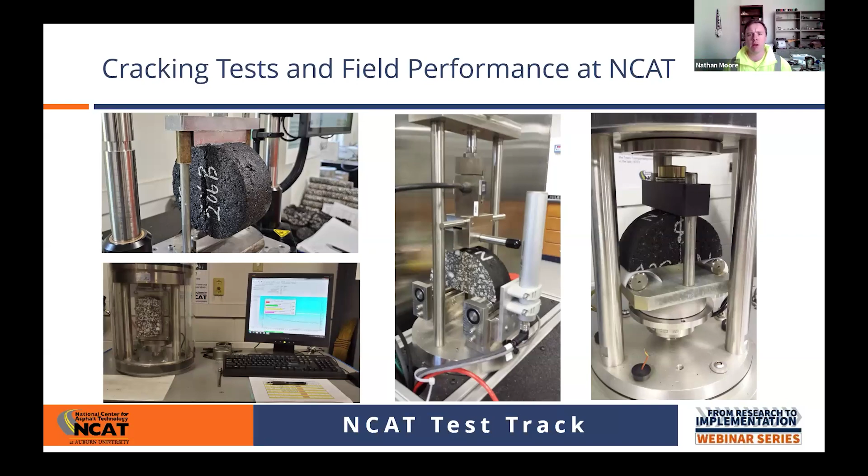These are actually some pictures I took doing my master's thesis. I actually started at NCAT looking at cracking tests and how they relate to predicting top-down cracking in asphalt pavement. So I'm very familiar with these tests, and I ran quite a few of them myself.

But it's a really important question, because if they don't relate to field performance, then it's kind of useless. And so you've got all these cracking tests. In 2015 was really whenever we started a flagship experiment that we call the cracking group, which Randy will talk more about in a minute.

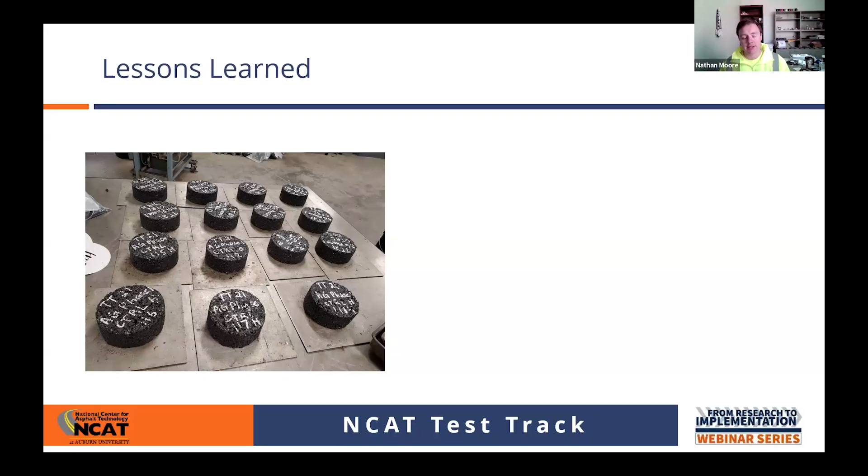Before we get started, lessons learned from my perspective: the test is really only as good as the specimens that are being used. We really learned the value of specimen preparation—that's something I preached in my days back at the NCAT lab. If location, location, and location are the three most important things in real estate, specimen preparation is the most important aspect of making good samples and getting good data from cracking tests.

So with that, I hope I kind of set Randy up.

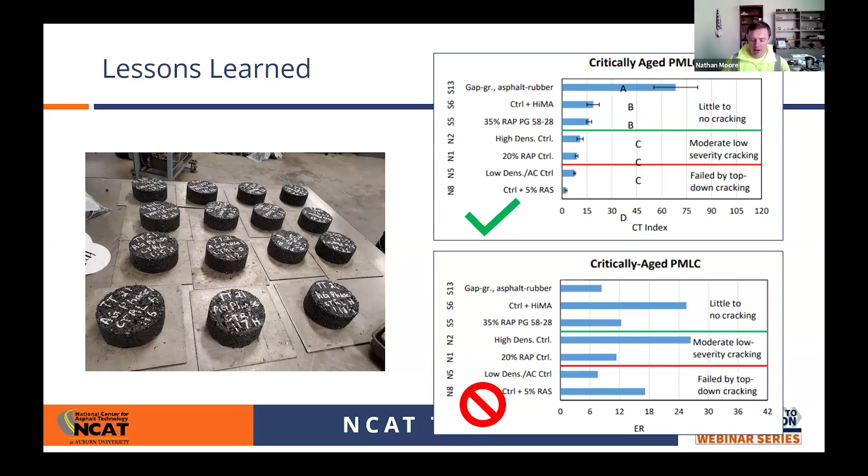All right, well good day everybody. Nathan kind of set this up. I'll jump right into the outline of the presentation I'm going to give over the next 20 minutes or so. I'm going to start out with just thinking about what are the objectives of the cracking tests, what are we trying to use them for, talk about different modes of cracking, and desired characteristics of tests.

I'll mention a little bit about aging effects and how that's important for certain layers. Then I'll get into the findings from the NCAT cracking group experiment that was completed about three years ago. But I'll also mention a few other validation case studies that have been completed, and some that are ongoing as well. And I'll provide a list of just a few references that I think are really important on this topic of the correlation of cracking test results to field performance.

So first, thinking about how asphalt mixture cracking tests will be used. Probably 15 years ago, when we were talking about cracking tests, we were thinking more about using the test for research purposes. Certainly that has been for a long time what we've used tests like bending beam fatigue and many of the older tests that have been around for a long time.

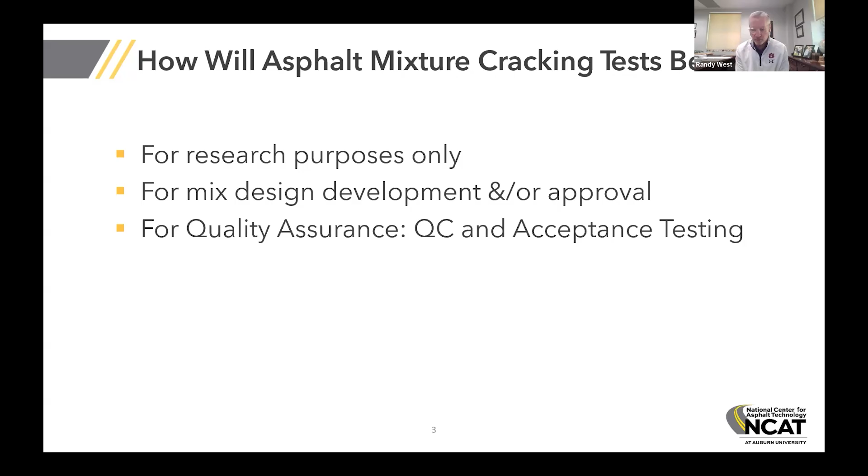But we realized that we need to get these tests, or some tests, to evaluate cracking resistance, rutting resistance, moisture damage resistance, and other things, into the hands of mix designers and eventually into the hands of quality assurance personnel—the DOT acceptance test and the quality control test. So that's the direction we're moving: trying to develop tests and find tests that are useful not just in research, but for these other purposes as well.

So thinking about those needs, what are the characteristics that we want? If we want this test to be used for quality assurance, then it needs to be simple. What that means is we may have to have a test that's just a simple monotonic test or a displacement test versus a cyclic test. We certainly want the equipment to run the test, prepare the specimens, and condition the specimens, all to be relatively low cost, because there's lots of labs out there in the quality assurance world.

We also want the results to be fast. We want to get the results quickly, not just in terms of technician time, but clock time—how long does it take to complete the test, including the conditioning time if that's necessary. One of the other things I think we've realized is really important over the last 10 years is the result has to have reasonably low variability. There are a number of ways we measure variability. In most test methods, we have within- and between-lab standard deviations, or within- and between-lab coefficients of variation. So those can be very helpful.

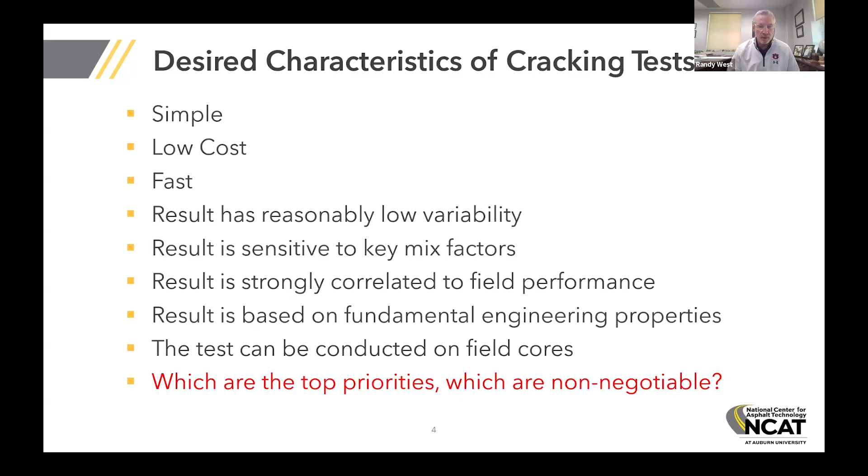So which of these items are the top priorities? Which are the most important? And which are non-negotiable? To me, the one that is most important and non-negotiable is that the test has to correlate well to field performance. If we don't have that assurance, then all the other things - simple, fast, variability - really doesn't matter.

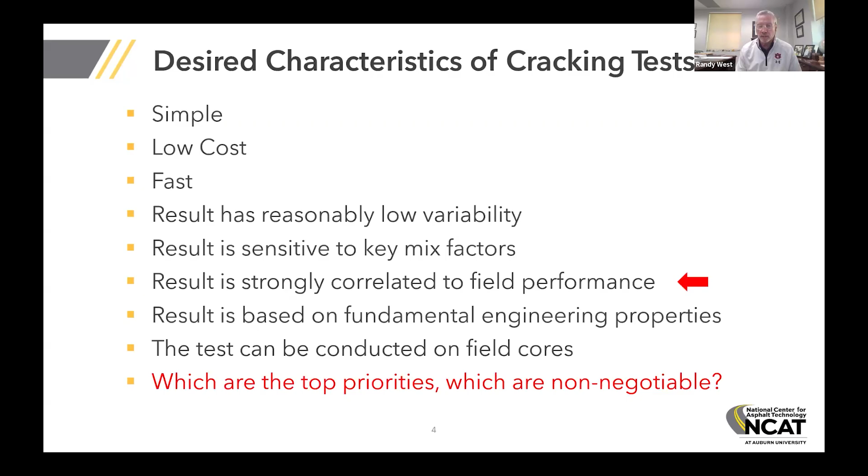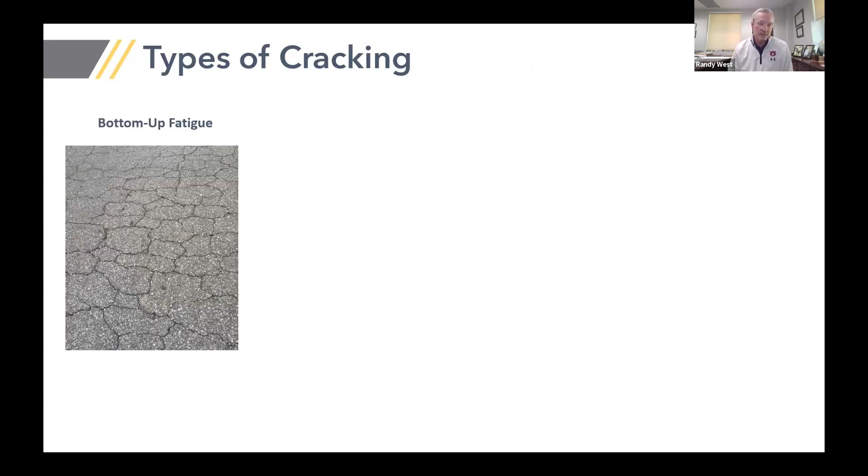So we started an experiment a few years ago that I'll get into in just a second, but we wanted to think about the different types of cracking that we know exist for asphalt pavements. We have bottom-up fatigue cracking, top-down cracking, low temperature cracking - maybe not in all parts of the US or the world, but it is a primary mode of distress in many parts of the US and around the world. And then reflection cracking, where we're talking about an overlay on an asphalt or overlay on a concrete pavement. Reflection cracking continues to be something we are challenged with.

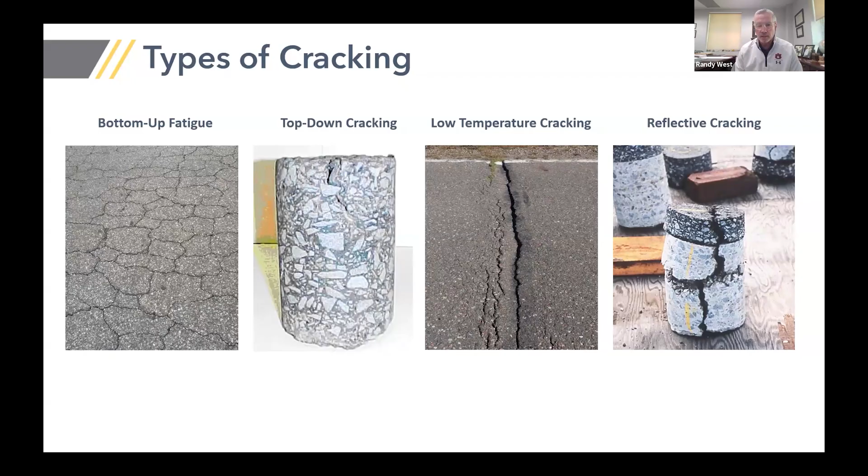And if we think about all these different modes of cracking, there's different strains, we're talking about different layers. So we have to consider the mode of cracking, the aging taking place in those mixes, and the strain levels.

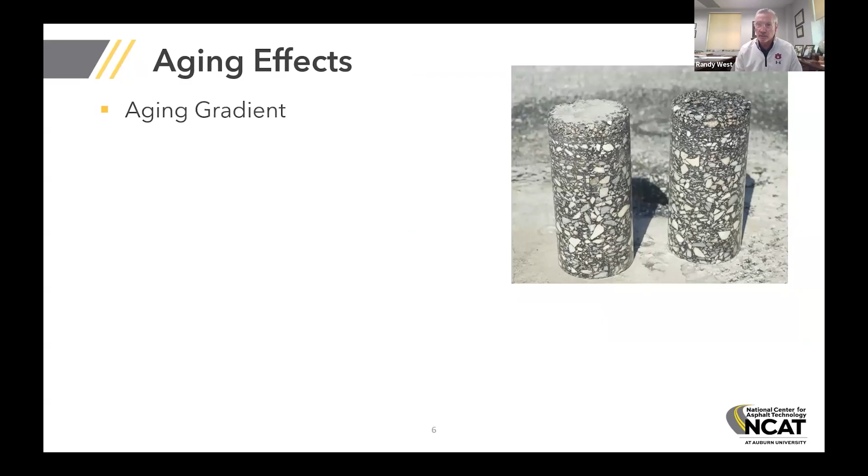So a little bit more on aging effects. One of the things that there's certainly some research on, but maybe it's not well known, is asphalt pavements age, and they age from the top down. In fact, the asphalt surface layers, the top inch or so, age significantly and rapidly, but the lower layers really don't age very much. And that's important when we start thinking about aging, laboratory aging of mixes to simulate the field.

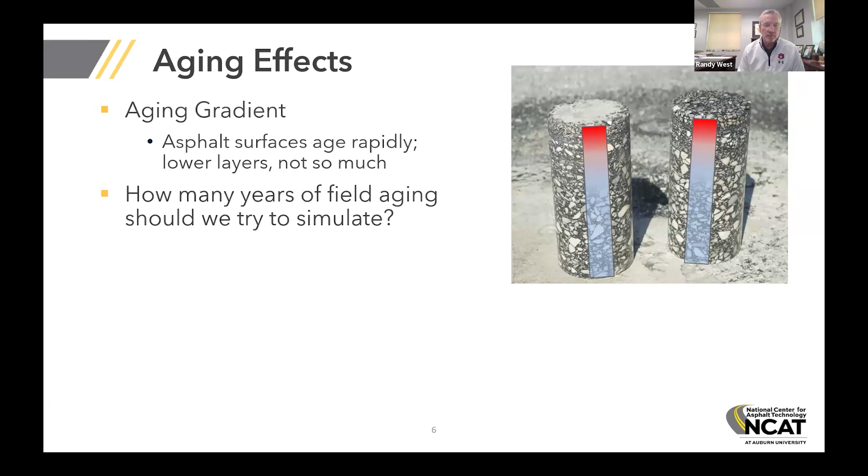Then we have to ask the question of how much field aging are we trying to simulate? How many years of field aging is important? Is it 1 year, 2 years, 10 years? That question comes into the decision about the mix aging protocols.

So currently there is an AASHTO standard, R121, on mix aging, long-term aging. And there's 5 choices that have all been used, and maybe are currently used, by different organizations, different states, and different researchers around the country. And there's ongoing work to help us still answer the question of what is the best aging, or the most appropriate aging. There may be more than one choice, but we do have these choices of different aging conditions that we can use.

The aging procedure that NCAT has worked on mostly, and that I'll talk about in this webinar, is loose mix aging at 135 for 6 to 8 hours. The duration, whether it's 6 hours or 8 hours, depends upon whether it's a southern climate or a northern climate.

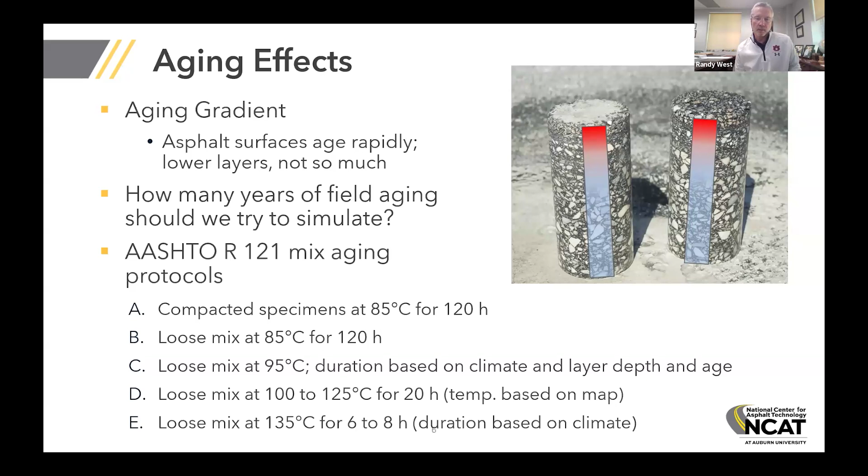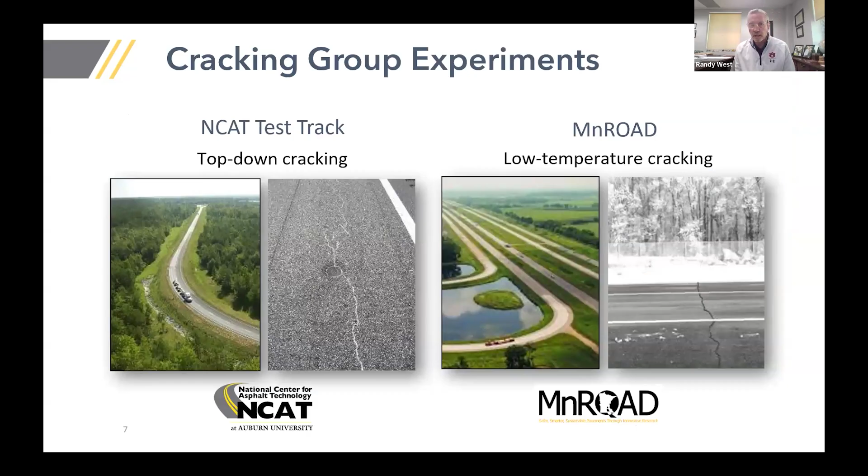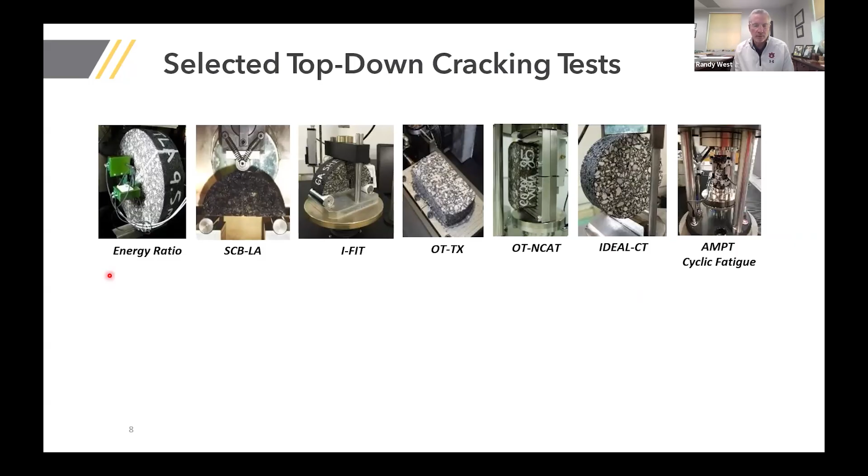So getting into this thing we called the cracking group experiment, it was actually a partnership between NCAT and MnROAD. At NCAT, we were looking at top-down cracking, and there's 7 different cracking tests that we included in this experiment, and I'll go through each one of these - not necessarily the test details, but the correlation to field performance. And we did these tests on both lab-prepared mix and plant-produced mix, and on samples that were short-term aged, plant-produced, and those that were reheated.

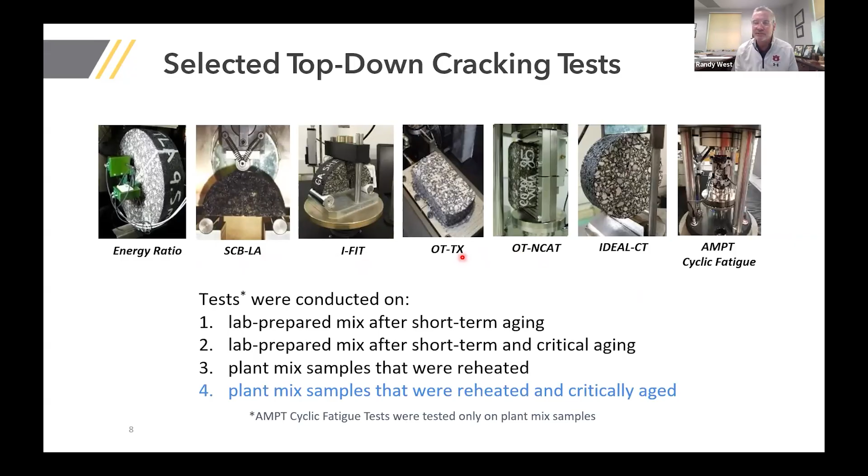I'm only going to talk about number 4 there, the plant mix samples that were reheated and critically aged. And I apologize for the red laser - that's an artifact of an earlier presentation where it looks like it recorded that laser movement. Hopefully we won't see that again.

On the test track, we built 7 test sections, and the experimental layer was only the surface layer, the top 1.5 inches. We wanted top-down cracking, and we wanted to avoid having bottom-up cracking. So we used a structure with a highly modified asphalt mixture in the intermediate and base layers to be very strain tolerant, so that we would not get bottom-up fatigue cracking.

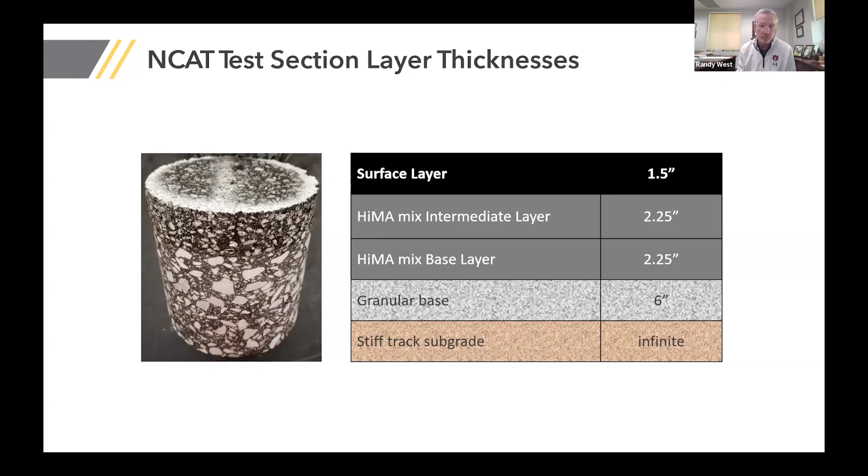And then we created the 7 mixes in this experiment with a range of mix expected performance in terms of top-down cracking. We achieved that by just putting in some things in the mixes like polymers or shingles to create different cracking susceptibilities.

All right, so now I'm going to get into those 7 tests. I'm going to start out with the energy ratio test. If you go back 10 years ago in the literature, this was sort of the one that people thought was going to be the cracking test we need to use. There had been very little research on this outside of the researchers that developed it, so we included it.

It's an indirect tensile type test, but with strain gauge extensometers glued to the specimen face. What I'm showing on the right is this chart that Nathan illustrated a little while ago as well. The 7 mixes are ranked here from top to bottom by best performance at the top, worst at the bottom. The top 3 mixes had little to no cracking, the 2 in the middle had moderate, low severity cracking, and the bottom 2 mixes failed by top-down cracking, all verified by cores.

So for energy ratio, a higher number was considered better by this previous research. But what we can see from this chart is it did not rank these mixes correctly. Some mixes with low energy ratio did really well, and some mixes with reasonably high energy ratios failed. So it did not show us the correct ranking.

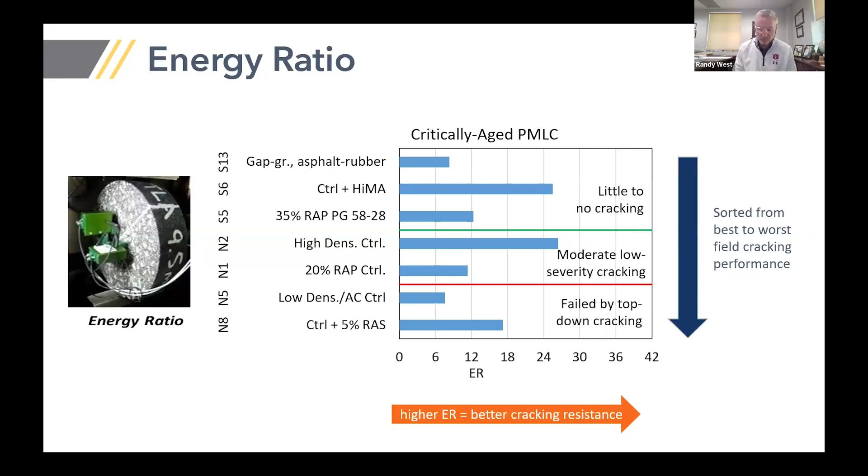Another way to look at the data is with an XY plot. On the X-axis is the energy ratio, and the Y-axis is the percentage of lane area cracking. We'd expect, if the test correlates well to field performance, that this regression equation shown by the dotted line would fit well in a nice linear relationship. R squared is our coefficient of determination - when it's 1, it means a perfect correlation; close to 0 means it's not so good. In fact, this one is showing it's very, very poor, close to 0.

So I'm going to show those 2 charts for all these other tests.

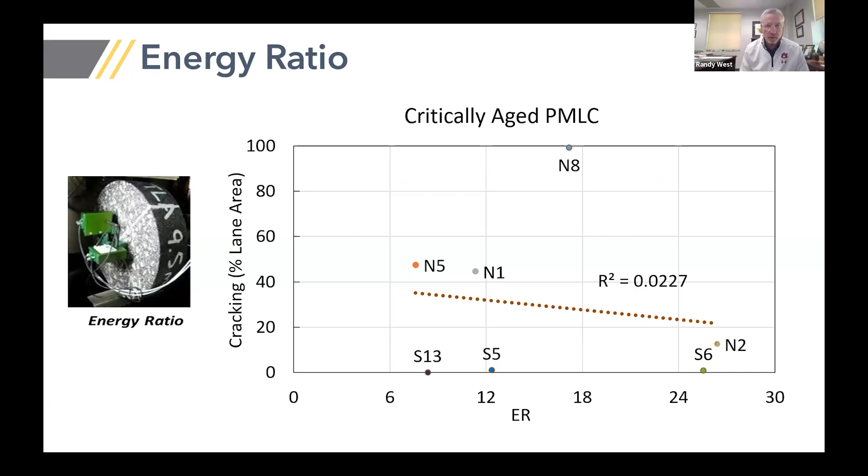One of the other tests that was popular 10 years ago and is still used in research mode is the Texas overlay test. Here you can see very clearly that the test ranked the mixes correctly - those with the best cracking resistance had little to no cracking in the overlay test. The overlay test beta parameter, some call this the crack progression rate, CPR - a lower number is better. The mixes at the bottom of this chart had the highest beta, meaning they were least resistant to cracking, and that's exactly what happened with those test sections in the field.

These letters A, B, C, D, E are the statistical analyses - tests with the same letter indicate they are not statistically different. We can clearly see that the mixes with an A were grouped together, mixes with C were kind of grouped together, and D and E were the best. So clearly we see statistical differences in the test result, meaning the test can discern good, moderate, and poor performance. That kind of statistical grouping is important.

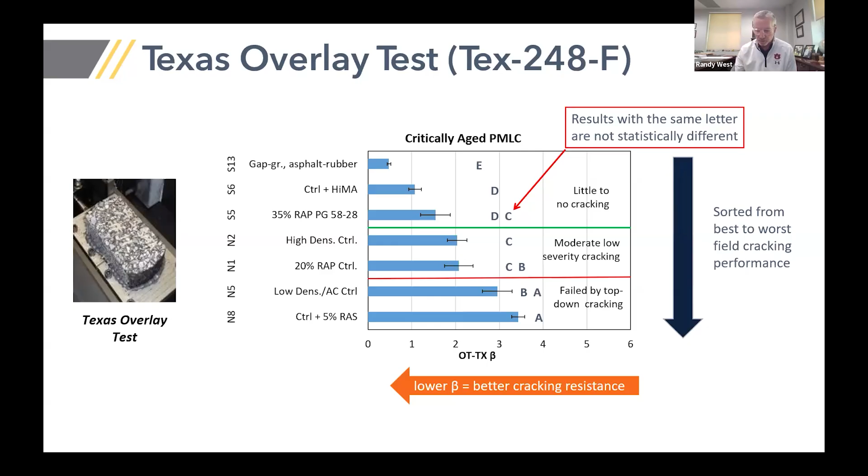If we look at the XY chart, you see that R squared here is about 0.79. That's a very strong correlation for a field test under control conditions, so we're really happy with this test as a good indicator of top-down cracking.

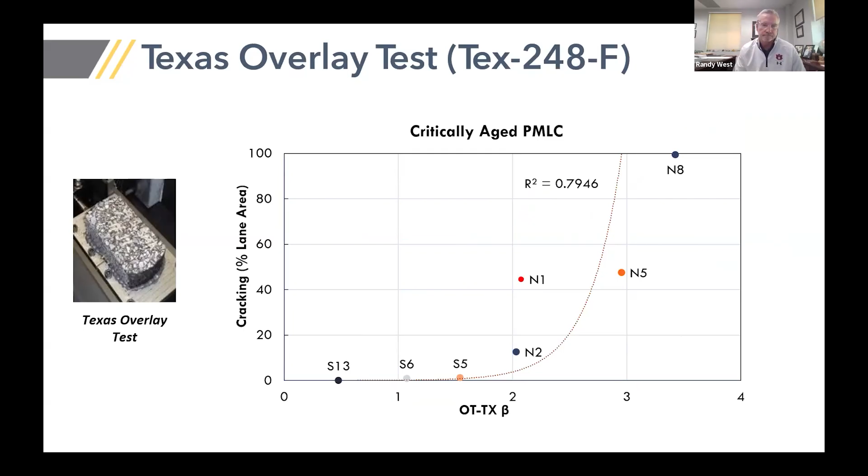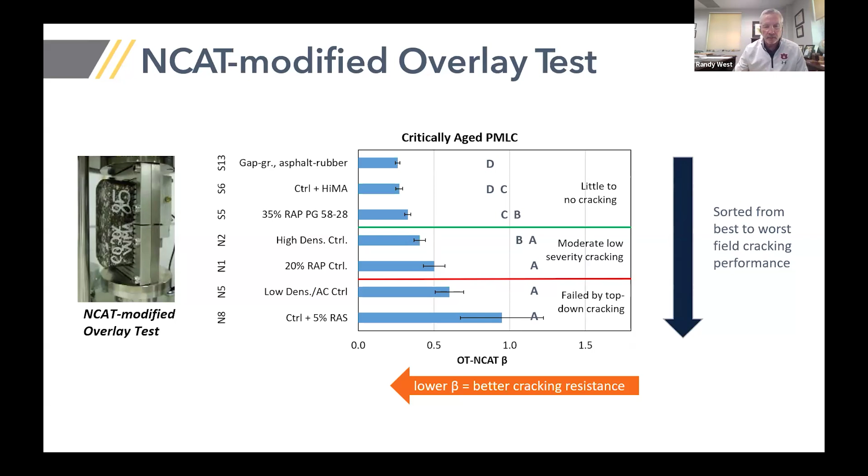We also did a modification of the overlay test based on some previous research we had done at NCAT, using a smaller displacement and a faster cycling time. We see it also ranked the mixes correctly, got good statistical groupings, and when we look at the correlation between the lab and the field, we see a very strong correlation, R squared of 0.97, a nice linear relationship. So this is a really good test for correlation to lab and field.

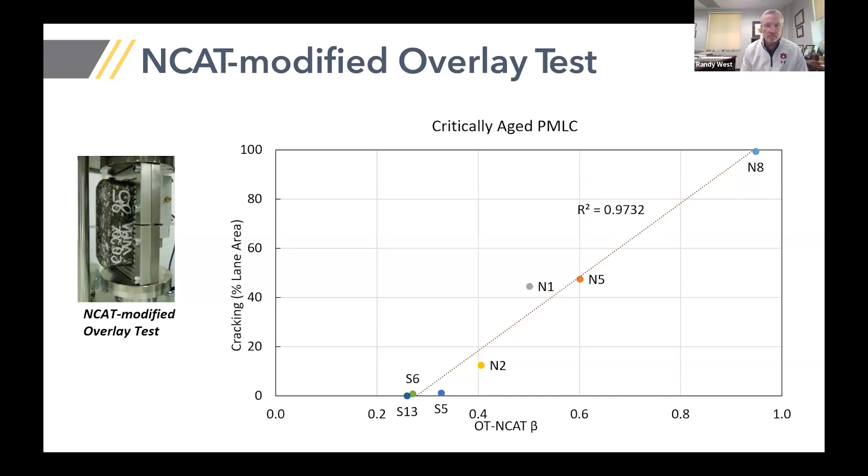Another test, used by Louisiana, is referred to as the semicircular bend test. This test didn't necessarily do poorly in terms of ranking the mixes, but there are some cases where mixes with moderate to low severity cracking had better test results than mixes that performed really well.

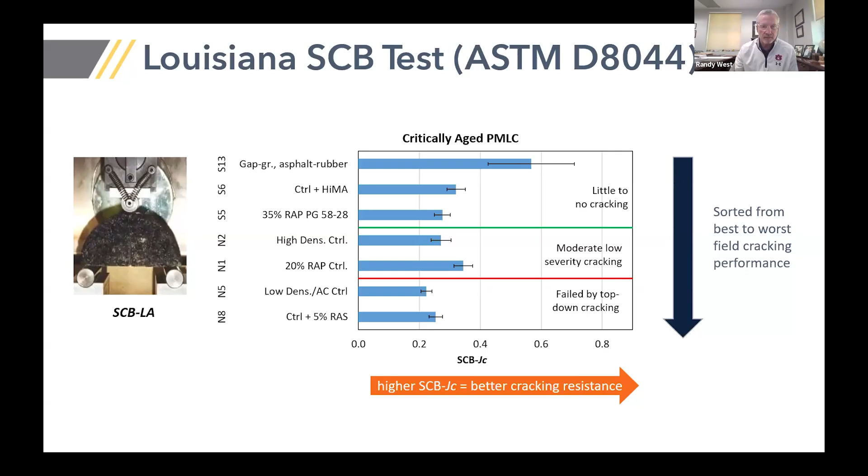If we look at the correlation, the XY correlation, R squared is only about 0.2, and that's not a very strong correlation.

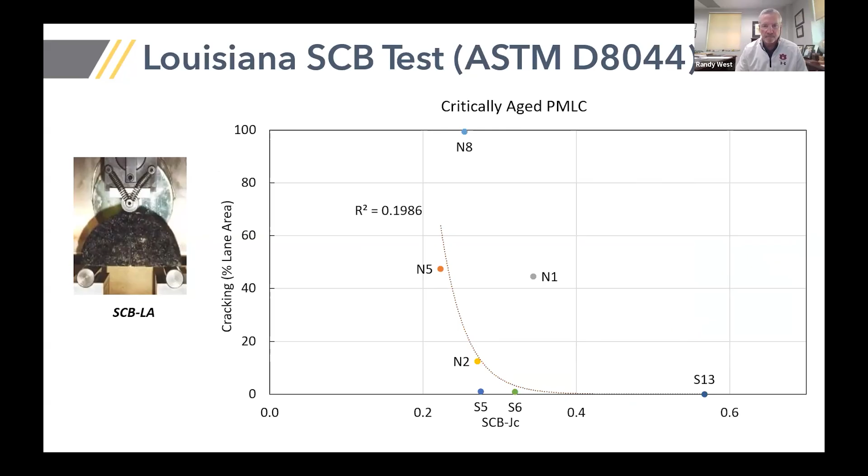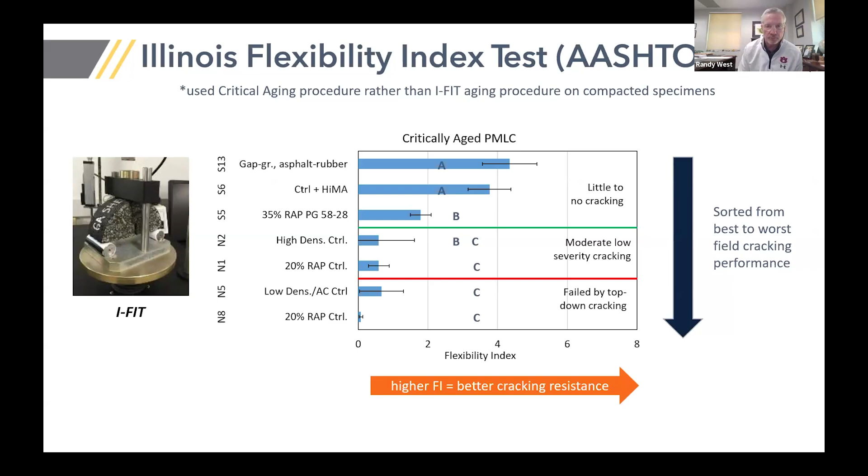Another test that is used and has been very popular over the last couple of years is the Illinois Flexibility Index test, or I-FIT. It is used in the state of Illinois, and you see it rank the mixes very well in terms of ranking versus the field performance we observed. The correlation, the R squared for this test, is 0.89. So that's a really strong correlation.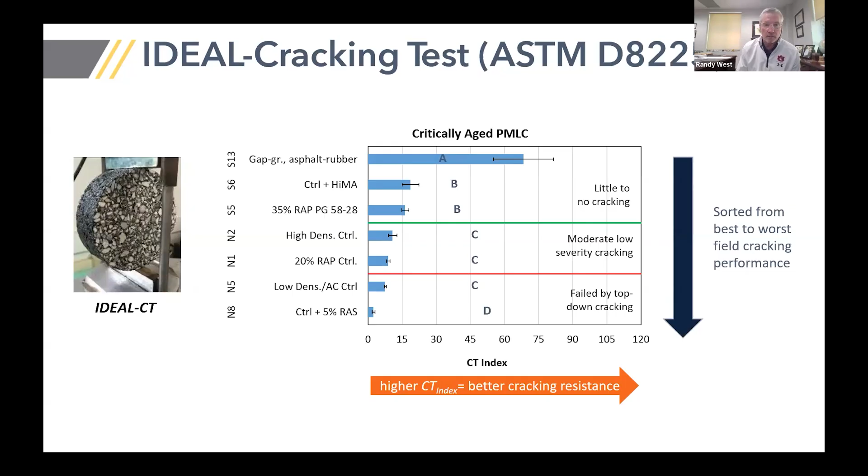The IDEAL CT is the most popular test being used around the country for BMD. It also did a very nice job of correlating with field performance in this experiment, with good statistical groupings, and the XY correlation very strong, R squared of 0.96. So a really strong correlation between lab and field results.

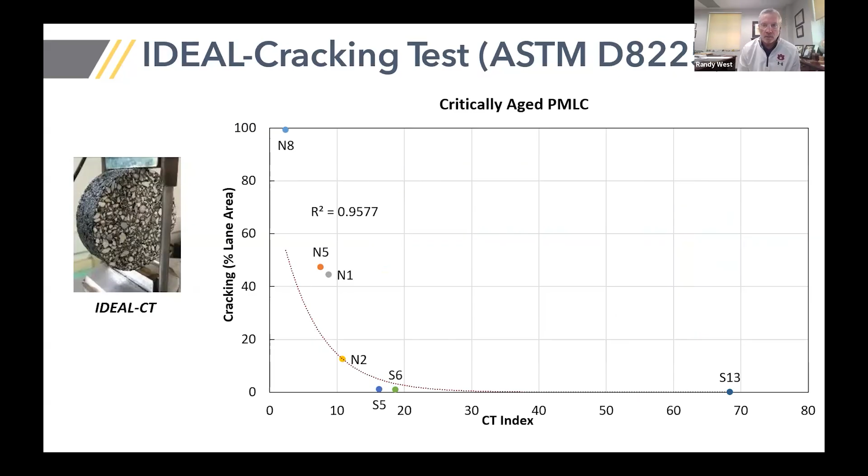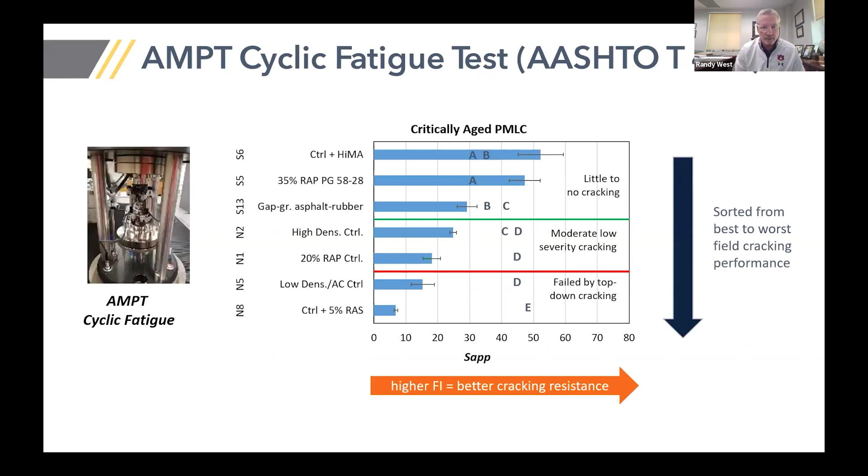The last test that we ran was the AMPT cyclic fatigue test. It also ranked the mixes correctly, as shown on this chart, and the R squared on this was really good, about 0.90.

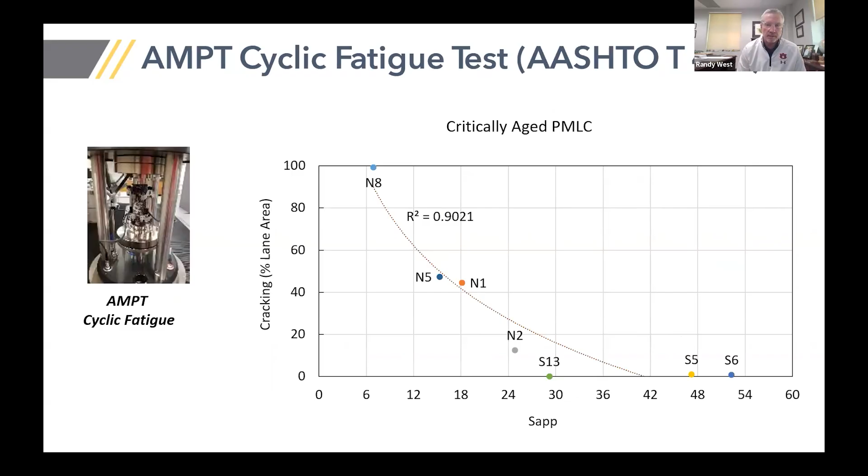So in summary, we have quite a few tests that correlated reasonably well between lab and field. Between the Texas overlay test at about 0.79, we have R squares up to 0.97, but anything near or above 0.8 is considered a really strong relationship.

Now, some of these tests aren't simple, and some of these tests are not fast. So considering all those characteristics that I mentioned before, we certainly see why the IDEAL CT test is popular. It has a reasonably good coefficient of variation, good statistical grouping, and a strong correlation to field performance.

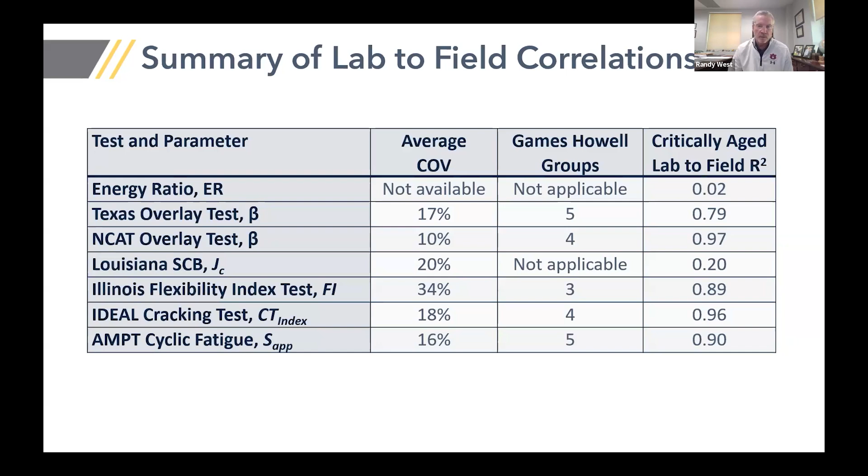Now that's just one experiment, one set of test sections at one location. We partnered with MnROAD to do a similar experiment in Minnesota, intended to evaluate thermal cracking or low temperature cracking. I don't want to go through all the details I went through for the NCAT experiment, but again, we looked at a variety of tests.

We looked at the correlation between the lab and field performance, and that experiment is documented in a separate report. We see there are some tests that did have a good relationship between the lab test and the thermal cracking we observed in Minnesota after 5.5 years.

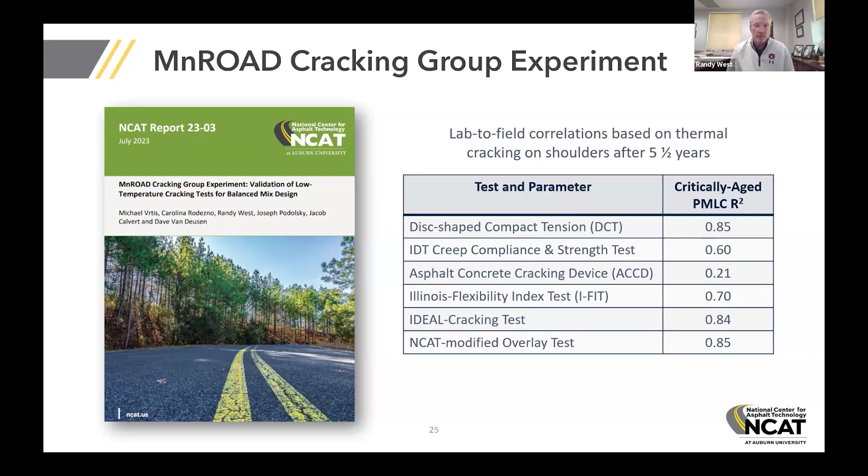There are other studies worth mentioning. I mentioned the Illinois Flexibility Index tests. They had initially done some correlations with an experiment on the FHWA accelerated loading facility, and then followed up with other correlations, shown in a chart, combining data from a research project and their pilot projects in Illinois, showing a good relationship between flexibility index and the rate of cracking observed on projects in Illinois.

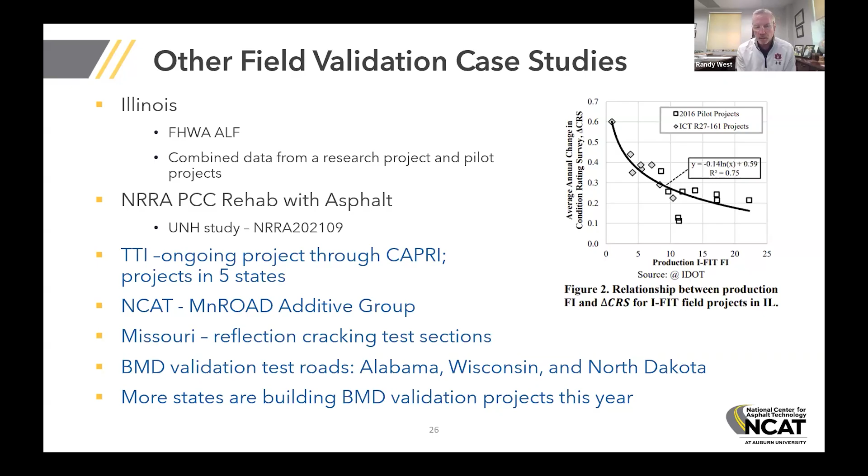There are other projects that have looked at reflection cracking. There's an NRRA study done by the University of New Hampshire, and that report's available. I've also got several other experiments, shown in blue text, that are ongoing: TTI has an ongoing project through CAPRI looking at projects in five states scattered across the U.S. NCAT and MnROAD have another experiment called the Additive Group, which is ongoing. The University of Missouri and the Missouri DOT are doing a reflection cracking experiment, also ongoing. And a number of states are doing BMD validation test roads or test sections on open highways, including Alabama, Wisconsin, and North Dakota, to name a few, with more states building BMD validation projects this year.

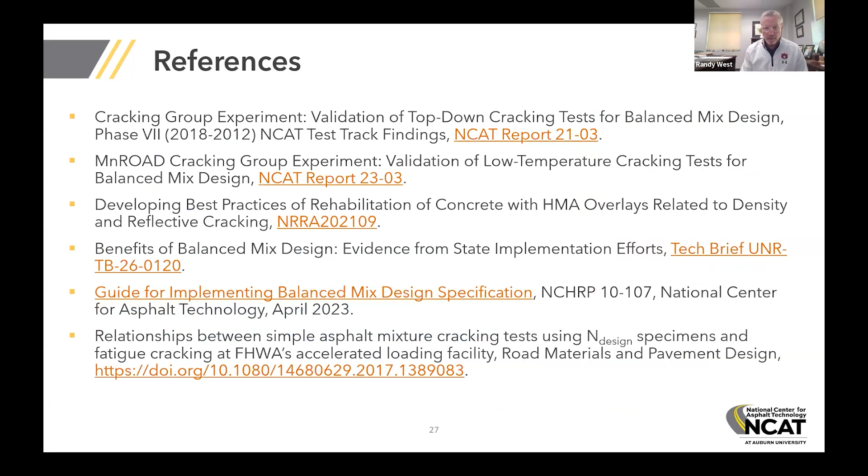Well, thanks to NCAT for inviting me to participate on this webinar. We've been doing a lot of work in Oklahoma, and it's always good to show it and have some insights and questions from other people. So it's always good to have that.

Also, regarding Nathan's comment, yeah, we all learn to have our lab shoes and normal shoes. We had an incident with a 5-gallon binder bucket that I dropped on my nice shoes. Well, I didn't get burned, so they work. So these shoes are good for liquid binder at 300 degrees.

So okay, let's move on to what we were doing in Oklahoma in terms of correlation to field performance of cracking tests. We've been working on this BMD implementation for a while.

We started pretty much in 2018 looking at what's BMD about, do we need it, is this something we want to pursue. And we decided to move forward with it and start looking at different tests, how we're going to specify this.

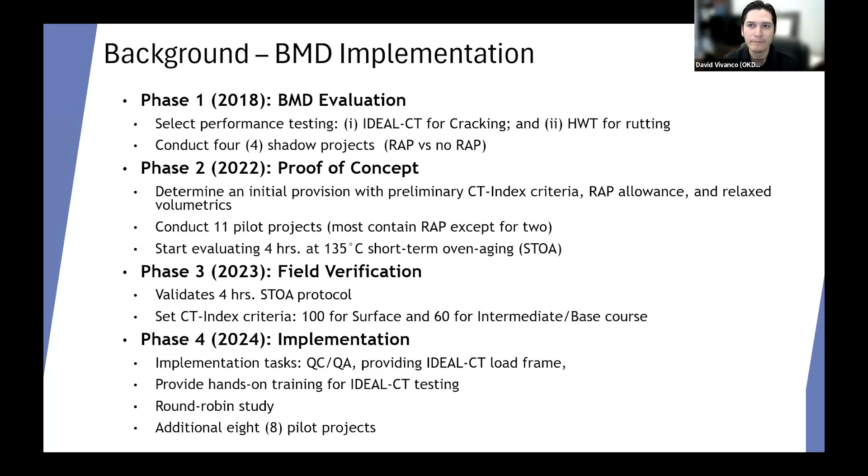I'll say it started in 2018, and we're still ongoing. In terms of the cracking test we looked into, at first in 2018 we looked into IDEAL-CT and I-FIT, trying to see which one we were going to move forward with. In that case we did 4 projects, a few mixes, control and BMDs. On both tests, 9 out of those mixes passed criteria, but 6 of them passed on both tests.

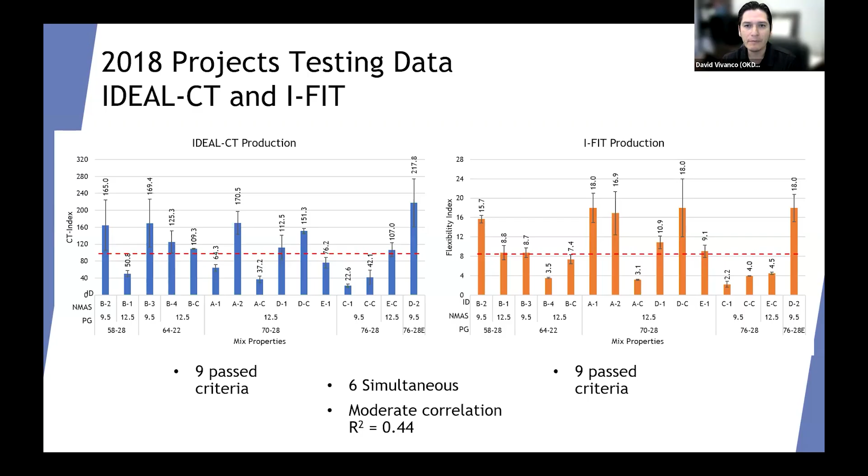We showed a moderate correlation of 0.44. We also analyzed variability in those tests. IDEAL-CT showed an overall variability of 20%, and I-FIT lower at 15%. We typically try to keep that variability around the 20% mark. When we go by nominal maximum on the 12.5 millimeter mixes, they show very similar results with 17 and 16% COVs.

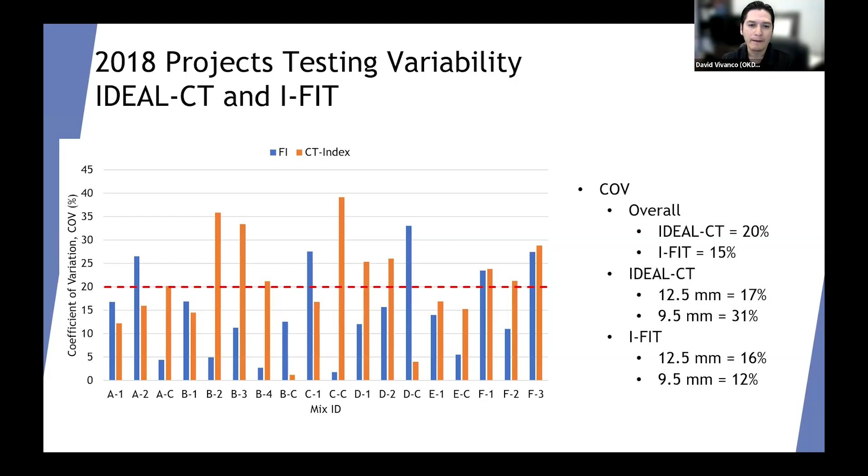We also checked sensitivity to mix components, specifically asphalt content. We ran 3 different asphalt contents on each test on lab fabricated specimens, and we observed that IDEAL-CT had better correlation with an R-squared of 0.95. That told us IDEAL-CT is telling us a bit more in terms of asphalt content. We did additional analysis like random forest and some other methods, and IDEAL-CT showed to be a bit better on all of them.

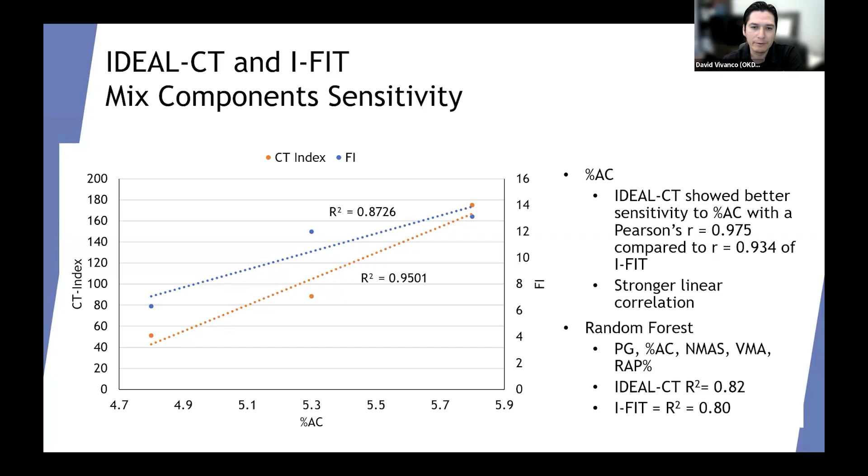With all that, and also thinking about actual implementation, how we're going to distribute all the equipment, acquire it, and provide training to field residencies, contractors, and consultants, we decided to move forward with IDEAL-CT because it was cheaper to implement and easier in terms of training. We realized in 2024, when we started doing actual training on a bigger scale, how different that was compared to imagining if we would have picked I-FIT, versus the challenges we observed training for IDEAL-CT. So I think we made the right choice in picking IDEAL-CT.

The performance test we use in our BMD approach is Hamburg for rutting. We've been running Hamburg for about 20 years already, so we're very familiar with it. We don't consider rutting to be a real issue in the state, so we'll continue with Hamburg during design. We don't run it during production since we don't see a rutting issue, so I don't think we should do much Hamburg testing in the field. In terms of cracking, we do IDEAL-CT. That's the one we're using so far.

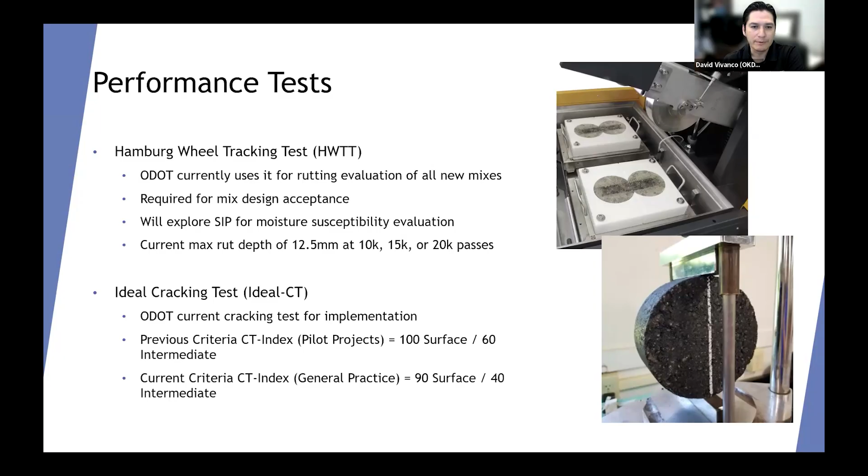On the 2023 pilot projects, we decided to use 100 for surface and 60 for intermediate mixes on IDEAL-CT. Now we're deploying our general practice special provision, where we're going to be running IDEAL-CT for design on actual BMD projects, or full BMD projects, across the state. So we decreased the requirement a little bit, to 90 on surface mixes and 40 for intermediate mixes, for that general practice special provision.

So in terms of correlation to field performance, we have two approaches, basically a short-term approach and a long-term approach. I'm going to discuss each one of those separately.

For our short-term approach, we rely on accelerated testing facilities like NCAT, and also on research projects. We partner with local universities, OU, OSU, and some others.

We've been working with NCAT since three cycles ago on BMD. So cycle 7, we did BMD and RAP, and we also participated in the cracking group experiment with the section, I think it was N8. That was a control plus 5% RAS mix that ranked last. So we are the perfect example of why we're not using that much RAS. I designed that mix, David.

Yeah, so we participate in a cracking group experiment, and we've always been working closely with NCAT in terms of sharing information, having those supporting test sections. So we actually get a lot from NCAT in terms of information for our specifications and what we want to implement.

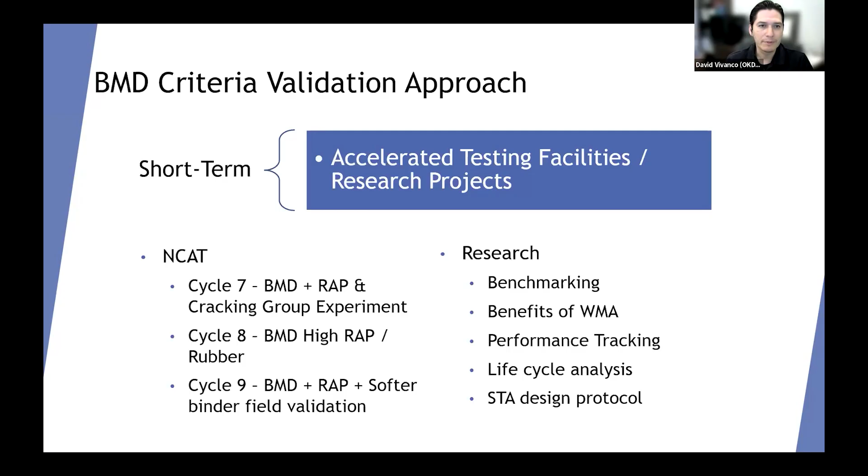And then what we did in the test track is saw cut the section to simulate that same block cracking, and basically recreate a worst case scenario using a mix that was at the edge of our BMD specification, basically 25% RAP, softer binder. So that was pretty much the most challenging mix we allow in terms of our BMD special provision.

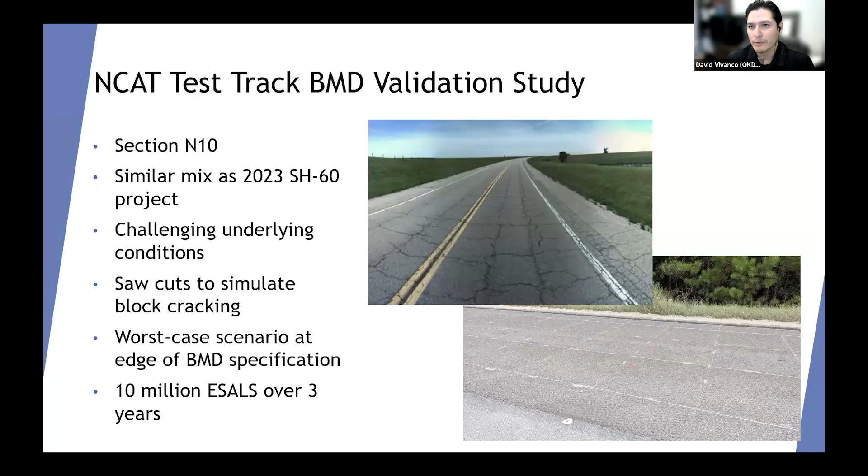So the idea is to put 10 million ESALs over 3 years on that section. I think so far it's been around 4 or 5 million ESALs. I think that mix started showing some cracking around the 3 million ESAL mark. So for us, that's actually a very successful mix, because that State Highway 60 project is actually a 3 million ESAL design life project. So it's showing us that we can go to that approach of requiring 100 on CT index, and we can use RAP up to 25% with softer binder with acceptable performance.

So it's also a bit on the grid. We saw cut that section, so we did sections of 8x4 feet and 4x4, to recreate that block cracking.

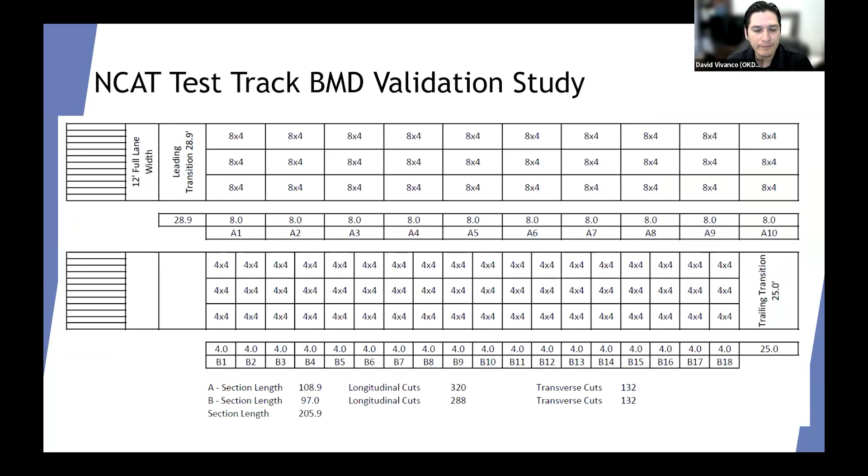So that's pretty much our short-term approach. Short term, we're talking about 3 years tops, which is basically the cycle of the test track, and it's typically the duration of our research projects with universities.

In terms of long term, now let's see, we build pilot projects and track performance. The way we did that in 2018 was that we put the control mix in one direction and the BMD mix in the other direction. That represents a problem with our approach of trying to use our pavement management system to keep track of performance, because the pavement management system sometimes only covers one direction of traffic. So in 2023, we decided to design those pilot projects thinking about and focusing on long-term performance monitoring.

So we put the control and the BMD mix in the same direction, and then we focus on using ODOT's pavement management system to keep track of that performance over time. For 2024 projects, we did the same, and we put all the projects in the same.

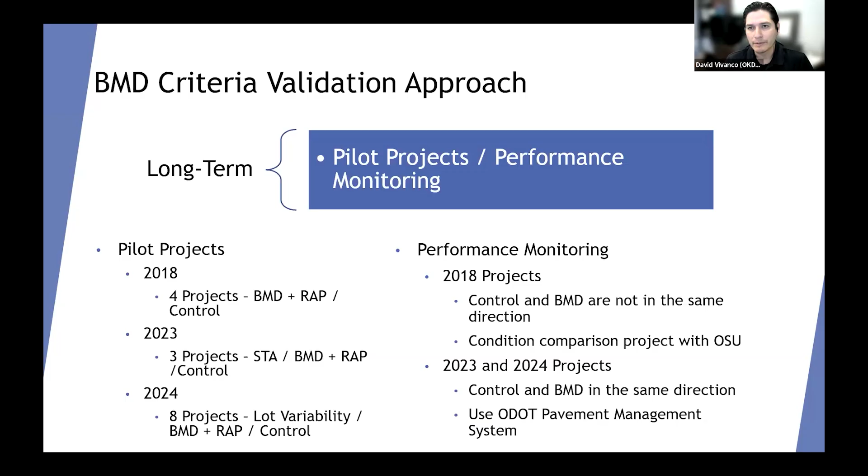The idea of having those pilot projects is that we want to have real world scenario projects that we're keeping track of. Test track is good, controlled conditions, but here in the state we struggle with extreme weather conditions that we may not see all the time in the test track. This week, Monday was 22 degrees, and we're expecting 95 tomorrow. So we have those crazy temperature swings, and this always represents a challenge for pavements. So we want real world local projects to keep track and see how they're performing.

In terms of designing those projects, I think it's an important part, and it's something we were discussing at the TRB committee meeting, where we need to start, as a state agency, approaching and partnering with our asset management departments and making them understand the big role they're going to be taking in terms of keeping track of performance of those pilot projects in the future.

They're familiar with condition tracking. They know what they're doing. They've been doing it for a while. So it's important to partner with them to understand the PMS, or pavement management system, functions and limitations.

Again, sometimes only certain roads are covered by the PMS. Maybe the accuracy and resolution is not what we need, or it might be able to isolate specific sections where you can use a bit more resolution. That's what we're doing in Oklahoma. We also design those pilot projects thinking about those functions and limitations, placing the control and research mixes strategically.

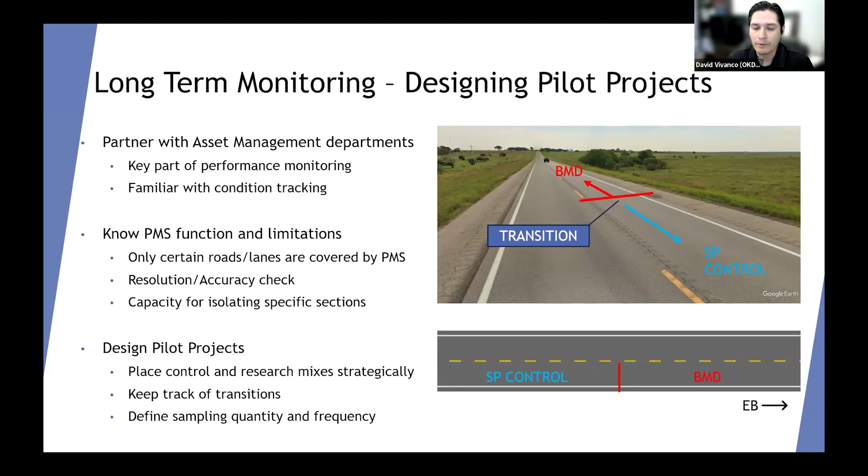Using BMD and control in the same direction, locating those transitions, also defining sampling quantity and frequency. The idea is to have multiple lots, sampling and locating those lots on our test sections to keep track of performance over time.

An example is what we did for 2024 projects. During design, we evaluated our mixes with rutting and IDEAL-CT cracking tests. That was for mix acceptance and selection, and also to have that baseline lab or design data. Then during production, we actually tested multiple lots, basically all of the BMD lots and all of the control lots in the same direction.

We not only sampled those, but we also tested those lots in different aging conditions: hot compacted, meaning compacting right after production without reheating, then reheated specimens, and then critical age specimens. That's to have the full set of results for us to compare. In the future we can maybe isolate lots that are showing some distresses that others are not showing, and see if it actually matches with what we observe in hot compacted, reheated, or critical age production results, or IDEAL-CT values.

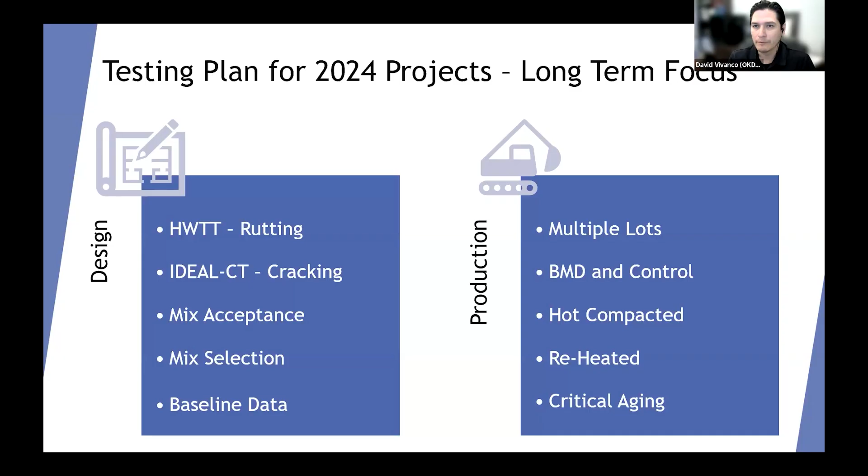Just an example of how that pavement management system looks like in Oklahoma, so we can actually track the progression of those distresses over time.

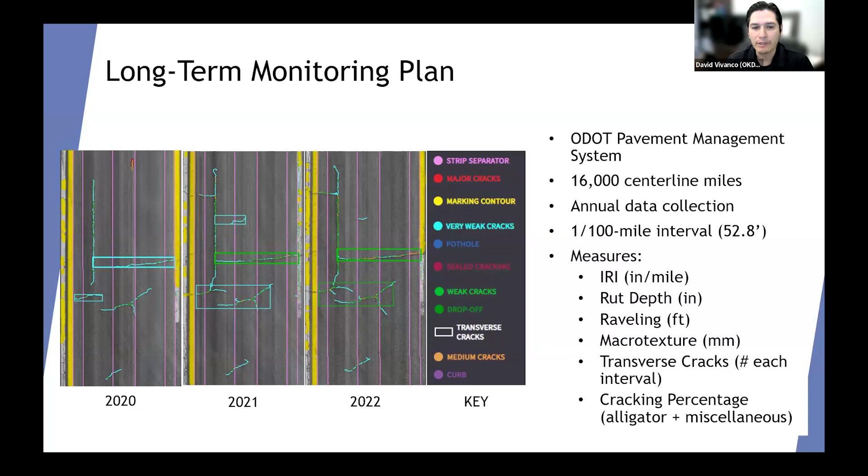We do an annual data collection, and we do it in an interval of a hundredth of a mile. We measure IRI, rut depth, raveling, macro texture, transverse cracks, and also cracking percentage, which is alligator cracking plus miscellaneous cracking. Those are pretty much the metrics that we're observing or keeping track of in our pilot projects.

This is how our report looks like. We have pictures from all those sections. We can see in the pictures the distress progression, and also on the 2024 part, for example, where it was right after construction. So we keep track of those metrics over time, and we'll keep track over a number of years until we actually see some differences. This is going to take a while, but we need to work on having these systems in place so we can keep track of these.

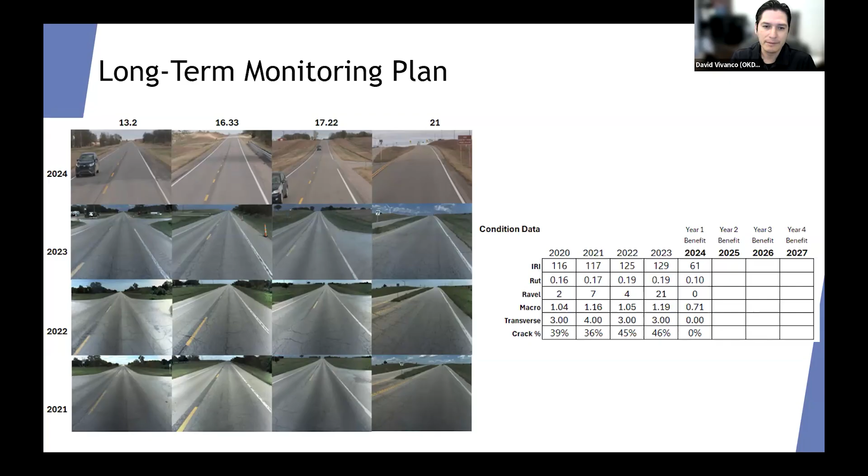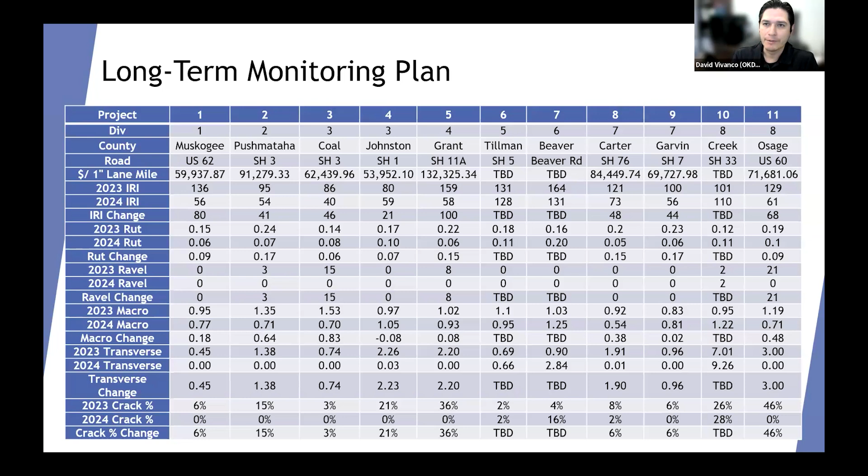So, what are we doing next in Oklahoma? On 2026, this year, we're actually deploying our special provision. It's pending approval, but I think it will be approved pretty soon. That will allow us to start bidding BMD mixes or BMD projects in 2026 as a general practice, like I mentioned before. We're going to keep working towards performance specifications. We're aiming, for that Approach D, at some point having performance-only specifications in the state.

That's going to take a while, but that's our goal. We're working on continuing the implementation of cracking tests for QC/QA.

The issue right now with the 2024 project testing and data analysis we did was that variability was kind of high or all over the place in some cases. So we want to limit or mitigate that variability to at least 20% COV within lab and between lab, as well as within lot and between mixes, and kind of limit that variability.

In terms of designing the mixes or design and approval of mixes, our COV is around 16%. That's why we're moving forward with BMD for design.

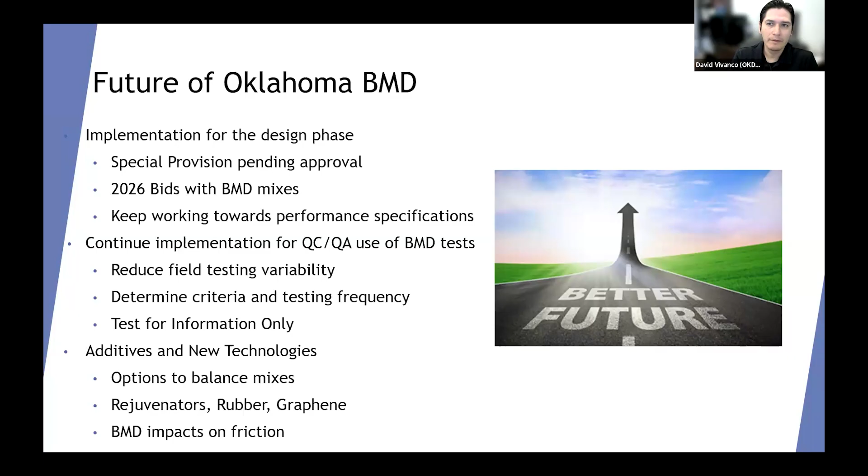So that's pretty much everything I have. I don't really have field performance or correlation information, but we're getting ready to have those data as we move forward with our performance tracking.

So just to kind of close this out, first of all, thank you, Randy. Thank you, David. That was excellent, very, very, very helpful.

To summarize what they said in terms of recommendations, Randy, I liked your wish list for what a good cracking test is, and I agree. The most effective ones, and the ones that are truly implementable, are simple, low cost, quick, repeatable, sensitive to mix changes. But first and foremost, they have to be related to field performance. Otherwise, you're just guessing.

But it is important to know what distress mode is of concern. If you're doing bottom-up fatigue cracking, you may not be critically aging for as long as a top-down cracking test. We didn't talk about rutting, but if you're looking at rutting, there's no need to age long-term. So it's important to make sure the test lines up with the primary mode of distress you're concerned with.

Our friends up in the north in Minnesota, they run the DCT test because they have low temperature cracking, which I don't even know what that is. I live in Alabama.

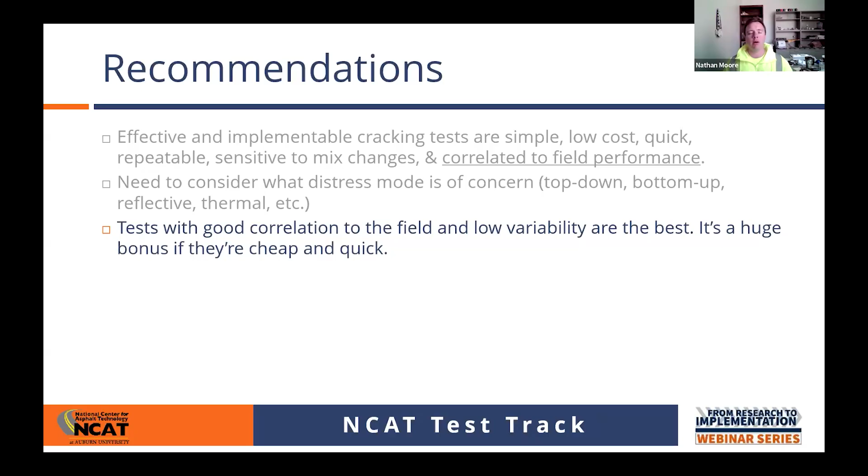But consider the impacts of aging. There are some questions in the chat, which Randy, I'm going to ask you to elaborate on. What are you trying to simulate? That would help you as you select one of those. I think there are five long-term aging procedures that Randy discussed. How long are you willing to wait? Is this for quality control, design, or research? Those are all important questions as you select aging conditions.

And then, David, I really liked what you were talking about. Randy, you hinted on this, but David, you really dove deep, and I thought it was excellent. Controlled field validation experiments are the gold standard for determining field correlation.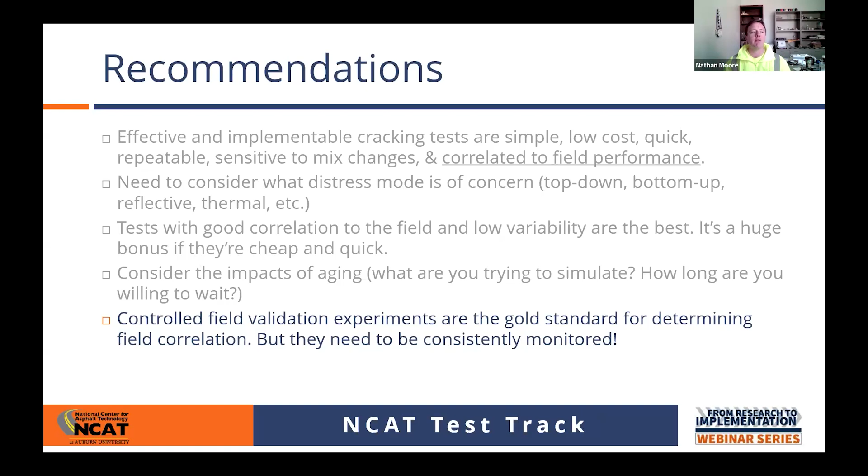Mining through PMS data and doing big laboratory studies or benchmarking studies looking backwards is useful and helpful, but there will always be things you can't capture the effect of, maybe differences in base stability or age or materials and absorption. If you are building these things to figure out what test you want to use or what the threshold should be, controlled field validation experiments are the gold standard.

Nathan, I'll jump in there real quick. There's a guide for doing field validation work on the Capri website, capriasphalt.us, and it talks about the different ways states are trying to establish criteria. But as you've summarized here, I really think the best approach is doing field experiments, field test sections in the state with the materials, aggregates, binders, and construction techniques that you use.

Your data for whatever cracking test will be different than what we show. So if you're going to set a criteria, it needs to be based not on NCAT's data, it needs to be based on your own data.

The real negative with doing those field experiments is you're going to have to wait a while to see the results. It may be 5 years before you have results that are meaningful between what works and what doesn't work in terms of mix cracking resistance.

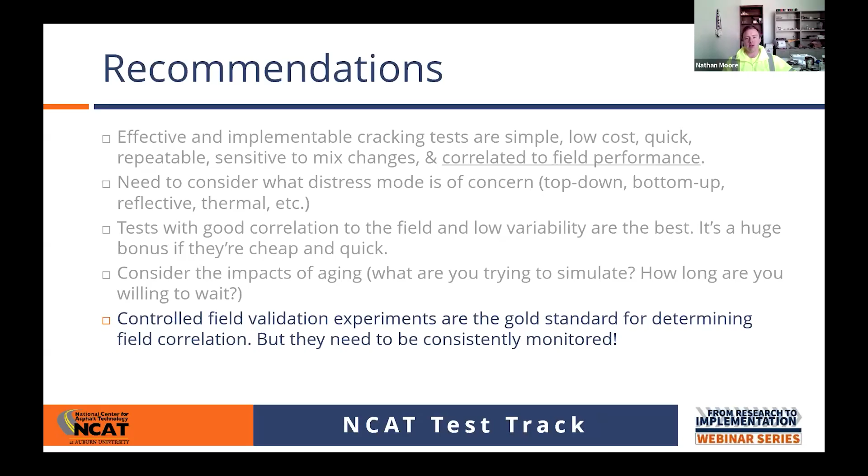What I was going to say is the best time to plant a tree was 20 years ago, and the next best time is today. So it's going to take time, but if you do it now, you won't be kicking yourself 5 years later wishing you had done it. So with that, I guess we got some time for Q&A, and I think the chat's filling up.

Randy, you answered a couple of these already, but I was wondering if you could go back there was a question about simulating the effects of moisture. The question is, field aging is due to multiple effects, for example temperature, moisture, freeze thaw. So would it make sense to mimic that in the lab as well, and would a cracking test correspond accordingly to multiple aging effects?

Thanks for that question. Randy, go ahead. I gave an answer to that question in the chat, I'll just give it for the sake of everybody being able to hear me say that. There probably are a number of factors, moisture may play a role, some other things, but the dominant factor for aging is just oxidation, and oxidation is really affected by permeability, air permeability, interconnected air voids. We have an ongoing study right now sponsored by Florida DOT that's really showing that very clearly. The point is we simplify the aging process in the laboratory and just use oxidation of the binder. The binder is the only thing that's really aging, rocks aren't aging much if any. We're using higher temperature to accelerate that oxidation process, so we're doing that by convenience and simplifying it so we can get results quickly and decide whether or not the mix has got suitable cracking resistance.